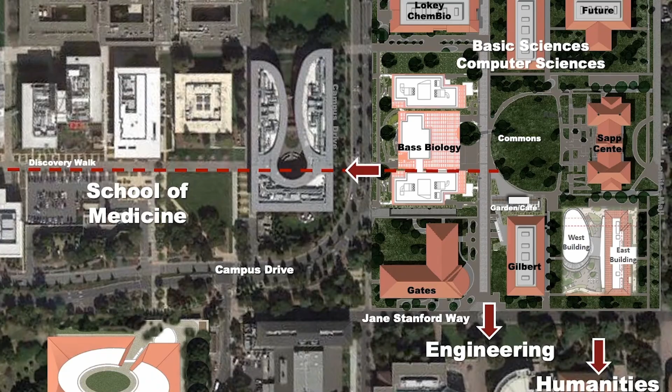Our future vision for this region creates a quad with landscape commons, a garden cafe, and a centralized below-grade service area, which have been completed, as well as two anchor projects: the Bass Biology Building and the Sapp Center.

The Sapp Center, in the renovated Old Chem building, not only focused on creating cutting-edge teaching labs and classrooms for biology and chemistry, it also included exterior convening spaces and social areas that support the faculty and students in this area of campus. Long wood benches, curvy lounge chairs, and tables with umbrellas invite community and interaction.

The Bass Biology Building serves as an extension of the Discovery Walk, as well as a gateway to the future commons. Its colorful, interactive electronic media mesh reinforces the portal, as well as represents imagery from biology research.

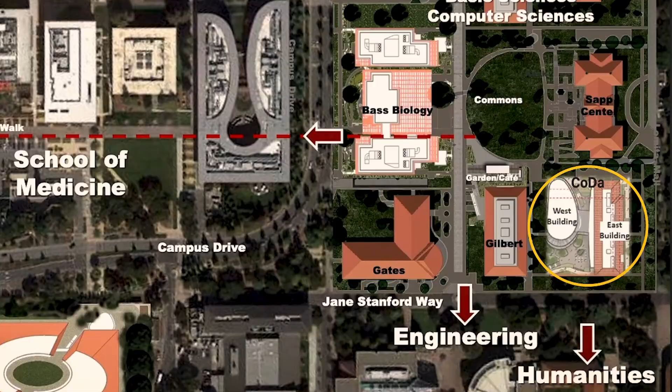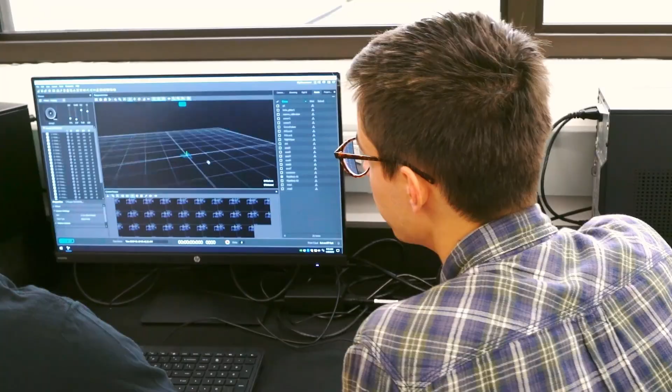The university recognizes the critical importance of the data science and computation complex. We need an ecosystem where great ideas can find the tools, methods, and collaborators they need to incubate and thrive—an ecosystem that will make our research better, inspire us to ask new questions, and find ways to generate new knowledge. I see this new building complex as a critical fulcrum for this ecosystem.

The complex will be an interdisciplinary hub sitting literally at the crossroads of engineering and H&S. It will be at the corner of Lomita Mall and Jane Stanford Way, right on the Oval—a phenomenal location.

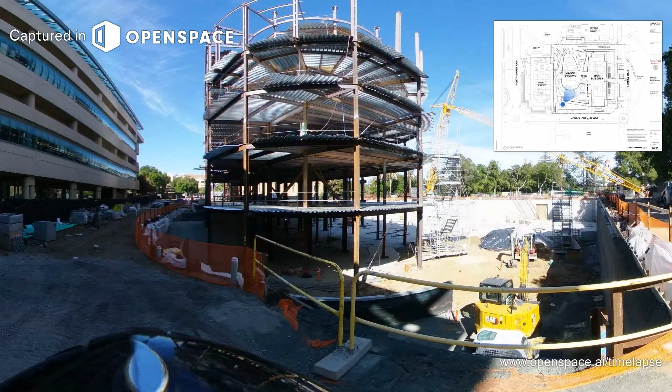The complex will have two connected buildings housing a variety of people and programs. There will be faculty from computer science and statistics, and programs like the Data Science Initiative and the Brown Institute for Media Innovation.

The complex will also be teeming with undergraduates as it becomes the new home for three of Stanford's most popular majors: computer science, MCS, and symbolic systems.

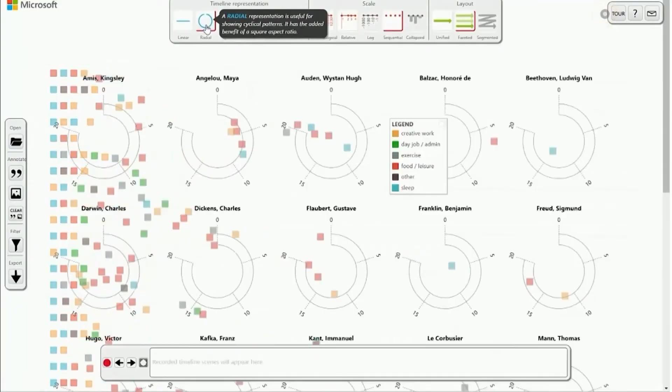Data science happens in every single field and every single pocket of the university. The Summer of Data is part of the Data Science Initiative, a new initiative at Stanford to weave data science throughout the fabric of the university.

One of the great things that makes Stanford so special is being able to work with people who have different perspectives and different ideas. It's also great to have a building that will allow us to run into people with different majors. When I was an undergraduate, there was no place for people to gather to work together on problem sets or discuss coursework or research opportunities, and I think having a dedicated location for that will be invaluable. The creation of new natural community spaces will create new opportunities for social interaction and help include more diverse student populations who might otherwise lack direct pathways to inclusion.

We have done a remarkable job meeting the needs of our students, but we can do even better if teachers and students have an environment designed around best practices, social interaction, group work, teaching support, and accessible faculty.

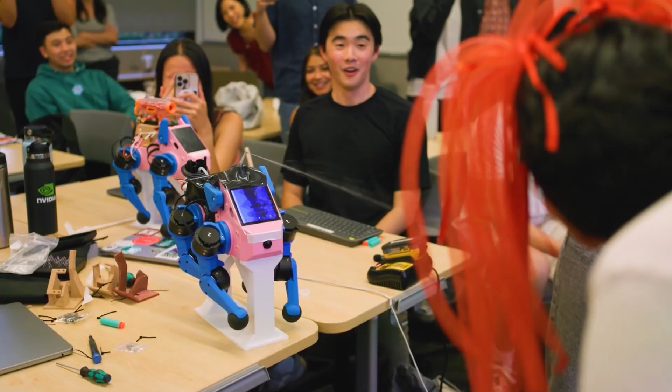In our rapidly changing world, more data is available than ever, and the kinds of research we can do with this data would have been unimaginable to scholars even 20 years ago. Think about projects mapping income mobility by zip code, those tracking land and livestock use to predict food insecurity, and projects using data to aid human health.

We need groups of scholars working on these issues from many different disciplines. The data science and computation complex is truly a vital part of the future of the university.

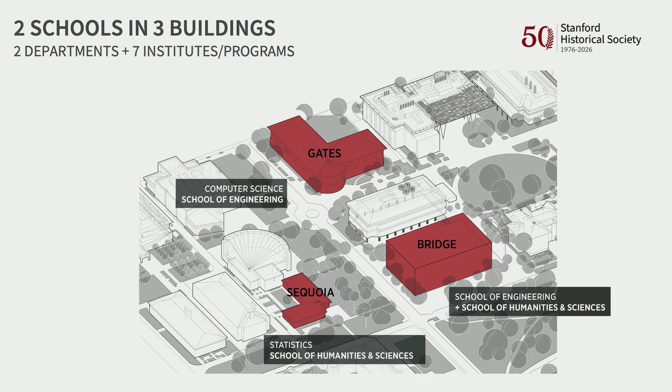The outcome of programming is a room list—we need 100 offices, we need 20 classrooms, etc. But really, the way we approach programming is different. We want activity-based programming. So we don't want to know how many rooms you need, we want to know what you need, what you want to do, and what types of physical spaces you need in order to do that. From that, we back into what types of rooms are needed. It's not a straightforward 'we need X number of offices'—it's more of an analysis of the activities and goals of the project and its users, and we build up the program from there. There are both quantitative metrics we use to evaluate these things, but also, importantly, qualitative ones, so the vision and the way people work is represented in the built outcome.

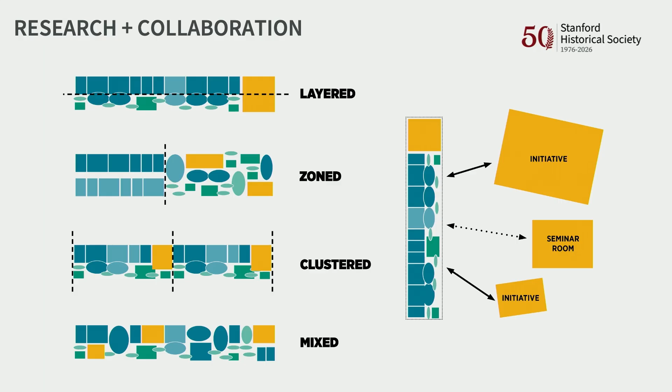Out of this back and forth came this diagram, which is a very foundational diagram, and I'm going to refer back to it throughout the talk, because this is essentially the diagram of this building before we had done any design work. It says there would be research neighborhoods, in green, and then what we eventually termed the hive, the in-between space where researchers and collaborators can be moving through on their way to and from places.

They can grab coffee, sit with colleagues at a table and work through something. That's really the glue that holds all this together, because that's where these discoveries happen. There's spontaneity of discovery and collaboration and seeing what your colleagues are working on. If they're locked away in another part of the building, you're never going to see it. But if what they're doing is visible throughout the rest of the building, you're going to run into them, overhear something, put two and two together and make a connection. That's what we were striving for with this building. This proved to be a very important diagram going forwards, our touchstone from a design standpoint.

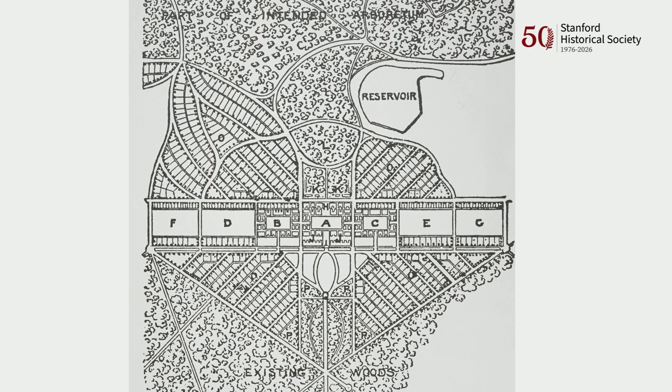At the same time we're working on the programming, simultaneously looking at the campus context and the site. That's obviously very important. Having just finished Paul Turner's lecture, you know what this is - this is the Olmsted/Stanford plan. Our site is at the intersection of the Oval and diagonally across from the old quad - a very important site that required a lot of thought, care, and planning, working with Sapna and Dave Lenox, the campus architect, and others to make sure our response was appropriate.

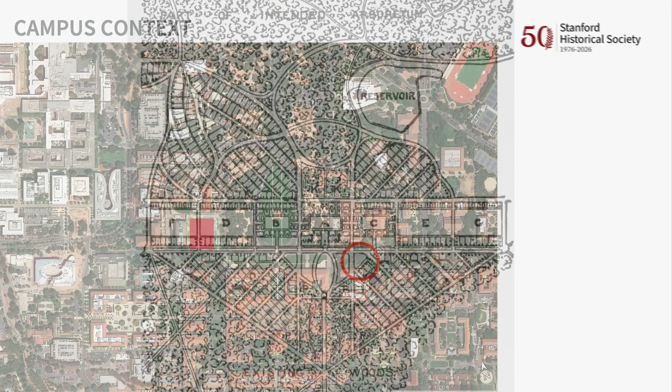This is an aerial view of the campus with our site in red. As I put this together I looked at it with fresh eyes and realized it's really interesting because you can see all the red clay tile roofs of the more historic parts of campus, and to the left, the medical and engineering side of campus, which is more contemporary. That plays an important role in where we landed, because we're at the intersection of those two things - we have Sapp Center, the old quad, the Oval, important historic elements we want to be mindful of and informed by, but at the same time we're bridging to a newer part of campus where the architecture is more contemporary.

Sapna mentioned there's a thought to create a new quadrangle between Sapp Center and Gilbert Biology. The intention is to tear down the buildings in the center and eventually create a new quadrangle, so this portion of the building is going to face out into an academic quadrangle. There's this evolution happening on campus that we need to be mindful of.

Early on, Sapna and others gave us what they felt were important key site design criteria that we should be designing to. Here you can see the new science quad represented in this image. Again, we haven't designed anything yet - we're just analyzing the site. What are the influences? What are the things we're going to be thinking about as we start to design the building?

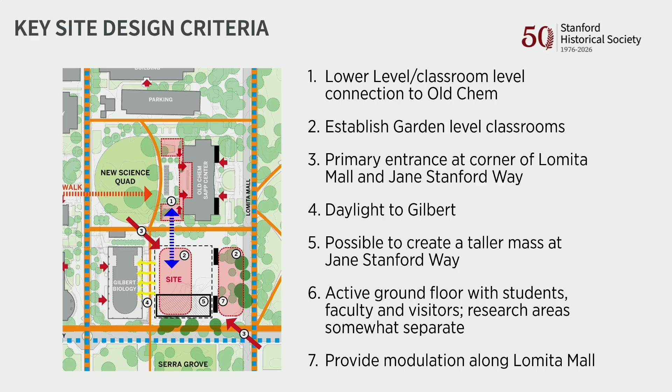Meyer Library was another one where they started to interrupt. Yeah, that's a loaded one, I know, but...

So one of the goals that we were intending to adhere to was to abide by the setback that Sapp Center provides for Lomita Mall, to restore Lomita Mall back to its full width, which allows for more pedestrian and bike parking, of which there's loads, of course.

We also were looking at the massing of the building. Again, we haven't designed anything, we're just testing kind of scale and size and relationship to Old Chem or Sapp Center in particular. We didn't want to shade the Gilbert side too much.

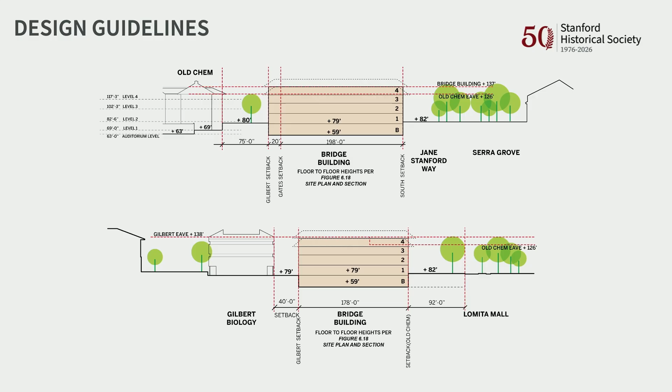So there were a lot of analyses of kind of massing and different ways of approaching the site from a building height standpoint. And then trees.

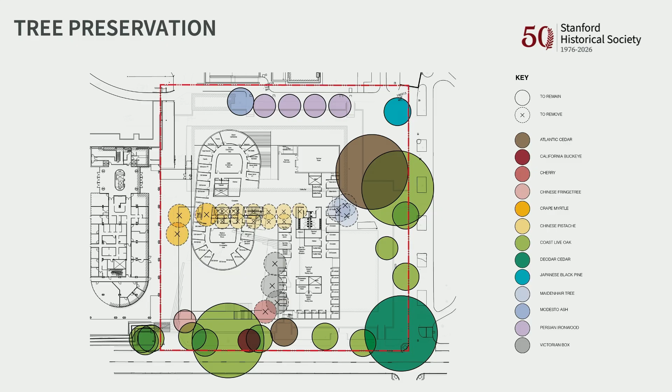Very vitally important on the campus. And of course there's some live oaks around the perimeter of the site, and we absolutely wanted to do everything we could to preserve those throughout the construction project, and to be sensitive to that component. So there was a lot that was done in the planning and the execution to make sure that the trees were protected.

So with those two things, kind of combining site and program, we start playing with ideas. And all of those people I showed you before, they're generating lots and lots of ideas. This is but a small sample of the types of ways that we start to look at the arrangement of the programmatic elements to think about how do we create that ecosystem of collaboration and research that we've been describing and exploring throughout the programming process.

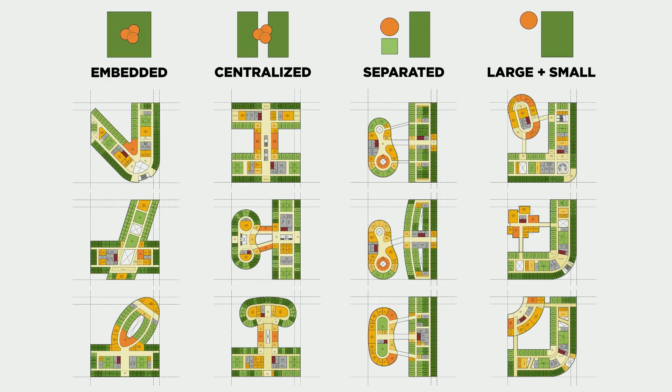And you can see the beginnings of what we ended up with in some of these schemes, where we started to identify kind of an element that was two separate elements, if you will. But there's a wide variety of different ways of thinking about it and exploring.

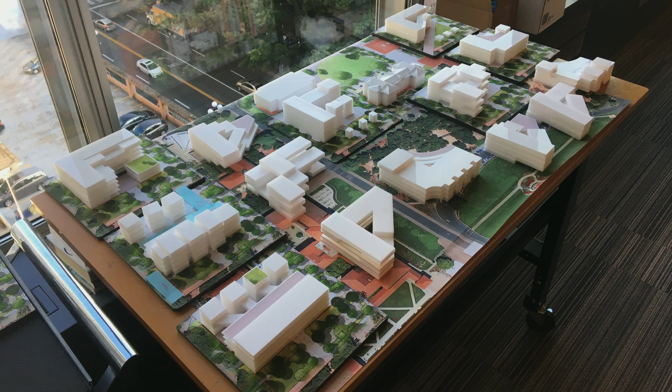And we tested all of these, including in physical model, to get a sense of the proportion and what they do with the site in relation to the other buildings on campus and in the vicinity. That's an important part of how we work. We like to build stuff still.

And here's some what-ifs. These are schemes that got taken a little bit further that ended up on the cutting room floor, if you will. But just to give you a sense of some ideas that were developed that I think were interesting and had interesting aspects to them.

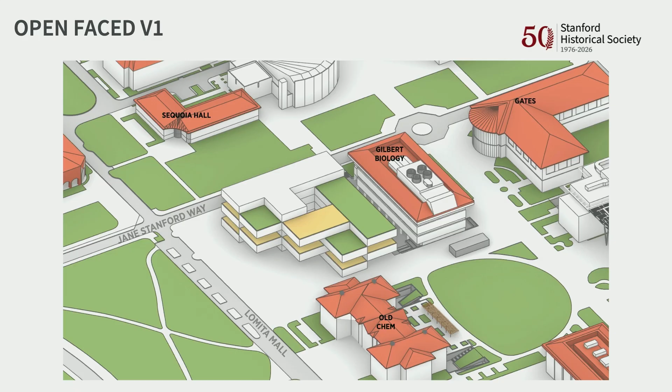This one, I think what's interesting here is it really kind of steps away from Sequoia Hall and creates a diagonal kind of entry into this future quadrangle, and is kind of respectful of Sequoia Hall by distancing itself from it, but it also backs up to Gilbert and creates not a particularly nice exposure within Gilbert. This is another version that's kind of similar to that with a different kind of approach.

Here's an idea of an element that would come out and have articulation on the Lomita Mall side that would start to represent or reflect some of what's happening with Old Chem, creating kind of different spaces.

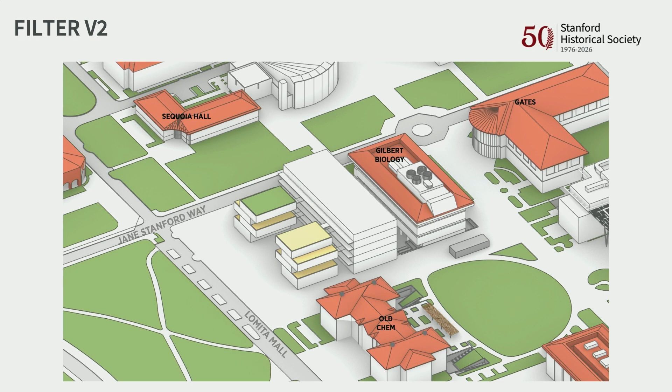But in the end, and this is a very early diagram of essentially where we landed, was this idea of two elements, a bar and an object, are the terms we used. We also sometimes called them the bat and the ball. So this idea, then stitched together with a bridge element, which becomes the hive, connecting the two together.

And the bar is rectilinear. It's very much related to the geometry of Old Chem and the other historic buildings kind of on the quad area, whereas the object building obviously is more contemporary, facing kind of the more contemporary side of the campus. So there's kind of a dual personality to the building, if you will.

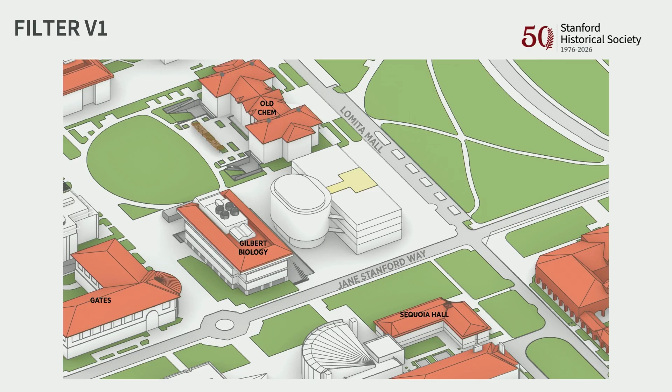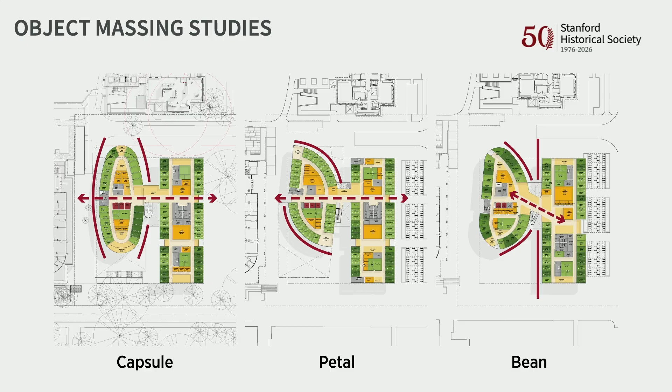We studied, once we kind of started landing on a general approach to what we thought we wanted to do, there's a lot of nuance in thinking about the shaping of these pieces and how they connect together and create kind of that ecosystem that we're looking for.

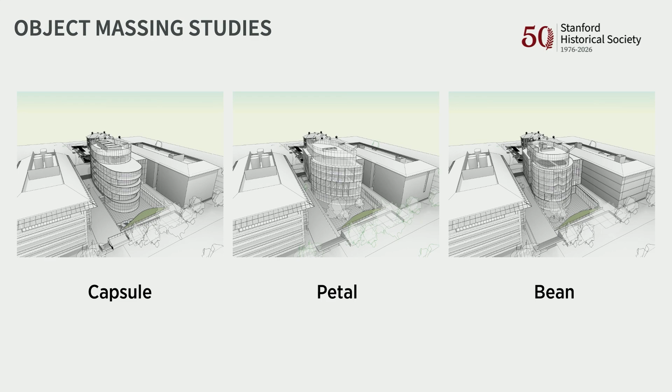And also in 3 dimensions, we're studying the massing to look at what we think is appropriate massing and relationship, again, to the campus and the precinct.

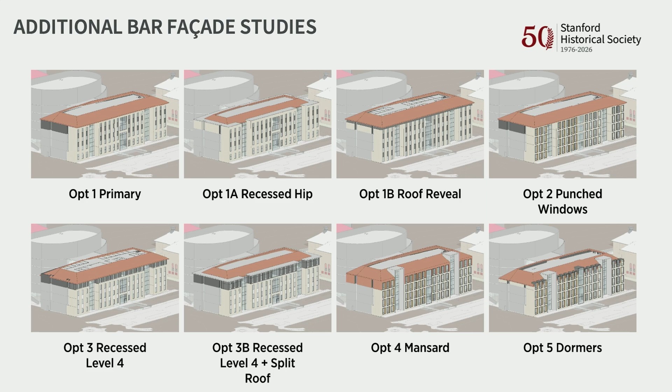Likewise, we did a lot of analysis and study of the bar building, particularly as it relates to Old Chem. Old Chem is this venerable, beautiful building, and once we're done, I hope they can lift the shades up and you'll get the full view of the roof, which is really spectacular from this room. But we were very mindful of the history and the prominence of that building and trying to be very respectful of it in thinking about the materiality, the articulation of the facade as it's moving in and out. Old Chem has a very deliberate way of doing that.

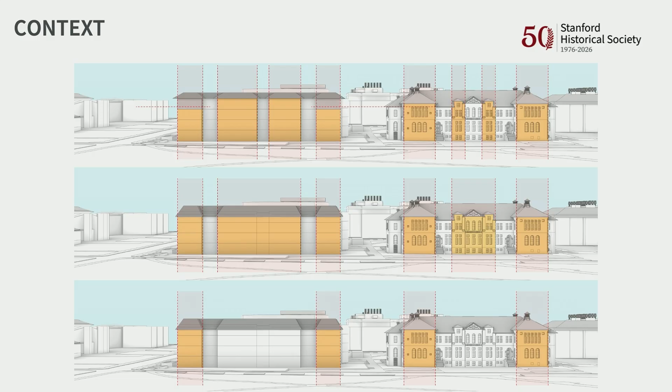In fact, I have another shot here. So this is an analysis. We're not proposing any changes to Old Chem, but this is just analyzing the Old Chem facade and thinking about how it's articulating itself, and how that can inform how this building can do something similar. We don't want to be completely mirroring it, but we want to be informed by it in terms of proportionality, materiality, and be a respectful neighbor, if you will, to Old Chem.

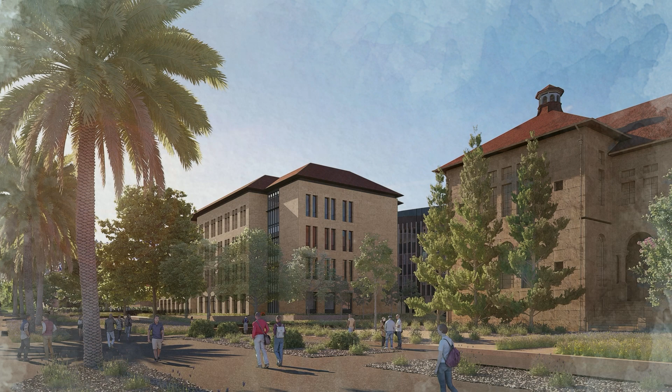It is a taller building, 1 floor taller than Sapp Center, and we spent a lot of time thinking about that. I do think there's something to be said for increased density in the center of campus, because as the campus grows, it's either going to grow up or grow out, and there's a lot of valuable open space around this campus that we want to keep as open space. The other advantage to density on campus is you get a certain amount of energy and activity from people coming and going. So I think it has to be done right, but if it's done carefully and thoughtfully, a little more density is not a bad thing in our mind.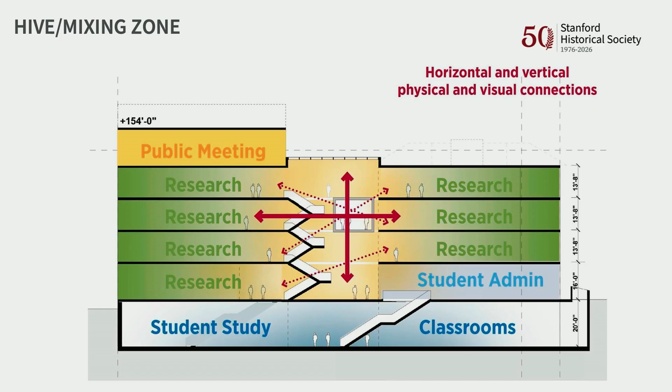And then, of course, there's the student study and classrooms on the garden level and the public meeting space, which we're in right now at the top.

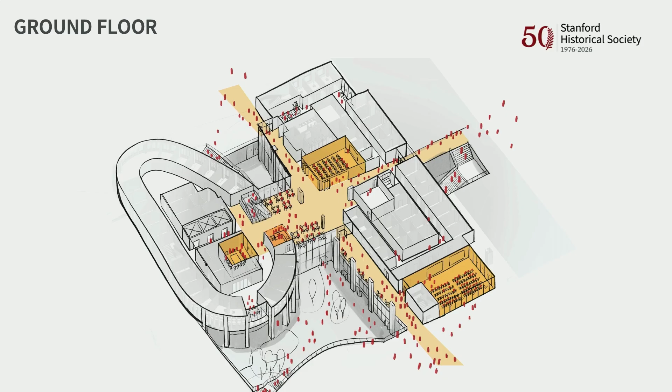So here you can see, again, these aren't the final design, but this is about halfway through design. This is what it started to look like. This is the ground floor. A big piece of this was multiple entries, trying to make the building as porous as possible so you could enter it from many different ways and into that center organizing element of the hive space.

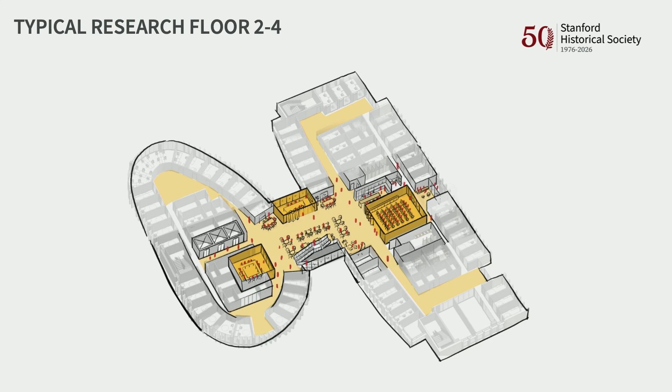And then on the upper floors, the research floors, here's where the hive really plays out. It's Sunday afternoon, so it's not going to be super busy, but if you ever have a chance, come back in the middle of the week and see the activity levels here. It's really amazing and inspiring to see. So the hive with the hive stair is here, but we also have a series of meeting rooms around each of these hive spaces on every floor.

There's glass into those meeting rooms, and many of them have operable partitions so they can open up into the Hive space. The idea is, let's say there's a guest lecturer giving a lecture, and you're coming in to get a cup of coffee, and you see on the presentation screen something interesting, and suddenly you want to go talk to someone about it. So we're trying to make the collaborative activities happening within the building visible to everybody, so people can share in that energy and activity, and those spontaneous discoveries can happen by seeing what's going on.

The Hive also acts as the quiet, alone space students asked for. They can sit off in a corner and get their work done, or they can pull up a table and sit with others and do group work.

Landscaping was very important throughout this process, being a beautiful campus to start with. The retained trees play an important role. There aren't as many trees along the east edge of the building because that's where Herrin Hall was, and when Herrin Hall stepped back, it left a void. We've planted trees there hoping that over time they'll fill out and be as dense and rich as the existing trees around the perimeter.

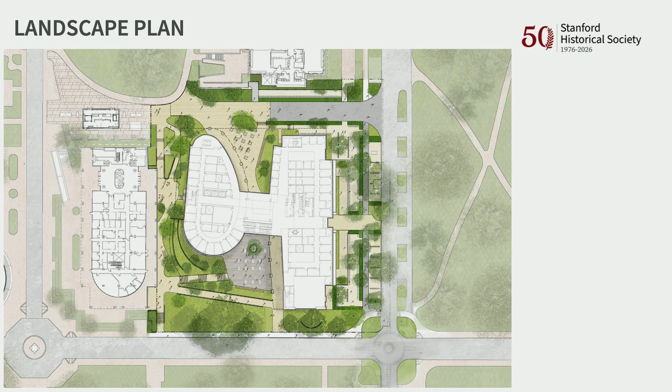The microclimates were also an important part of what we worked through. With the great weather the Bay Area is blessed with, we have a south-facing sunken courtyard with great access to light but also more shade, with covered tables, so you can get a variety of sun and shade, protected from the wind. The north terrace, which we walked through on the way from Sapp Center, is on the north side of the building, so it's more appropriate for a warmer day when you want to stay in the shade—trying to create a variety of different spaces that people will want to be in.

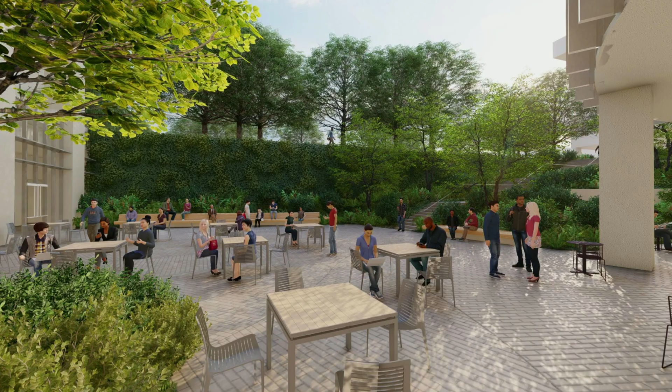The one thing this rendering very optimistically shows is a big green wall. That's currently a concrete retaining wall, and as beautiful as concrete is, our hope is it gets planted and fills in to become a green living wall eventually, hopefully in a couple years' time.

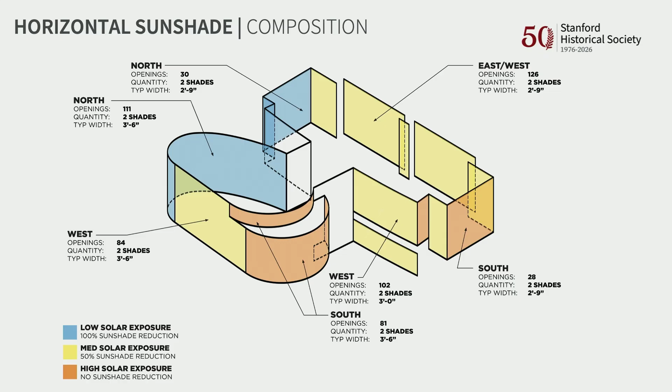Sustainability is very important in all our work, with many aspects like materiality and others, but just one example of the level of rigor we bring: solar heat gain is a big energy use in buildings, and we have to be thoughtful about getting daylight and views in and out while limiting the sun coming in, because heat gain has a big energy impact. So we did a lot of analysis of the different facets of the building, their orientation, and what shading strategies we could use to optimize performance, reducing energy use and carbon footprint.

We also do analytical analysis of all the different facades at different times of the year to evaluate performance and make adjustments to the geometry. So these terracotta fins, which you can see on the outside of the building, are spaced very carefully to optimize for performance on solar heat gain.

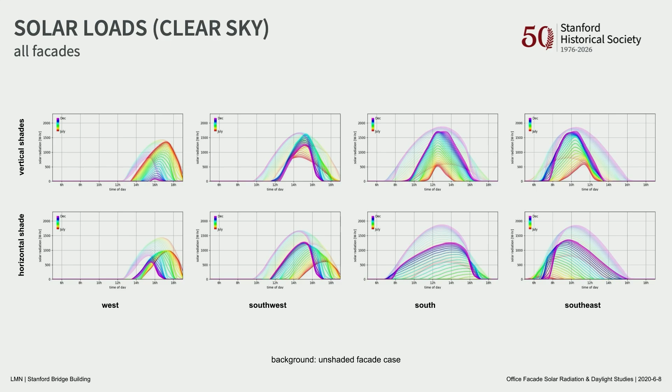And then the Hive mock-up stair. The Hive stair is a feature stair for the building, a really important architectural element to connect the floors. We feel it wasn't done just to do a neat stair, but to really encourage people to use the stair and run into colleagues and others, and to make the Hive feel like both a horizontal and vertical piece. So this stitches that together.

Obviously very complicated geometrically, and we wanted to study it and make sure we got it right. So we have a 7,000 square foot shop where we do a lot of mock-ups and prototyping in our office. We built a full-scale mock-up of a portion of the stair to test lighting, constructability, and the perforated pattern of ones and zeros on the panels, to make sure we were designing something that could actually get built.

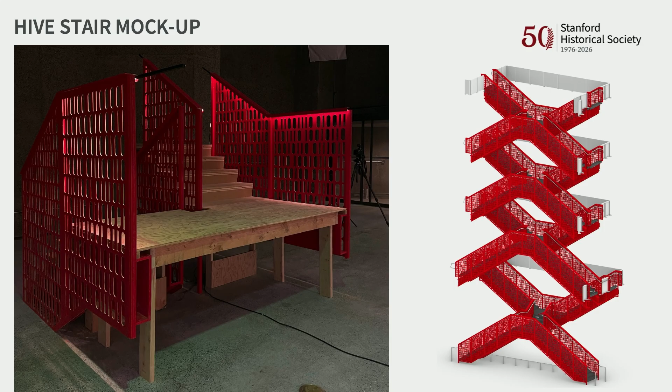And so now I'll finish with just some images of what this looks like. That looks really weird, but I guess it looks better from over there.

You can see the paving pattern in the garden court that I mentioned, and of course the Hive stair, which is really terrific and made all the better with Camille Utterback's art piece. She's a professor here for those who know her, and she did the installed art piece that interweaves its way through the stair.